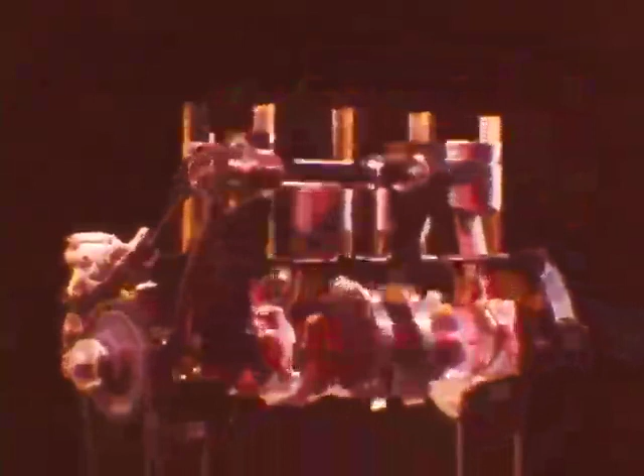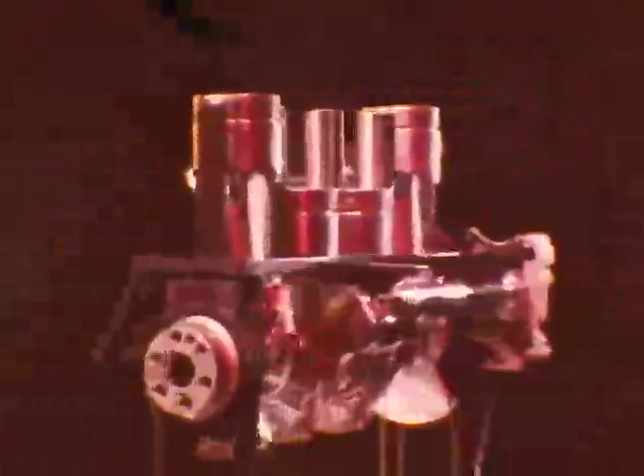The new Dodge Colt models for 1976 offer car buyers all the handling, economy, and styling features of previous models, plus engineering refinements that make these vehicles better than ever before. For the Plymouth side of the family, we now have the brand new Arrow models.

A quick look at the model lineup shows that the Colt is available in 5 basic models, while Arrow is introduced in 3 basic models. Although the Arrow is completely new to some technicians, we are only able to cover major components here. Colt models share many of these components, so we'll point out the similarities and differences as our story progresses.

The Colt instrument panel is essentially the same as before, with oil pressure and charging signal lamps instead of gauges. The panel is held in place by 3 screws at the top, 2 at the bottom, and 1 inside the glove compartment.

The Arrow panel is slightly different in layout, and on some models the console has an oil pressure gauge and ammeter instead of signal lamps. This panel is secured by 3 screws at the top, 2 at the left side, and 3 in the ash receiver opening.

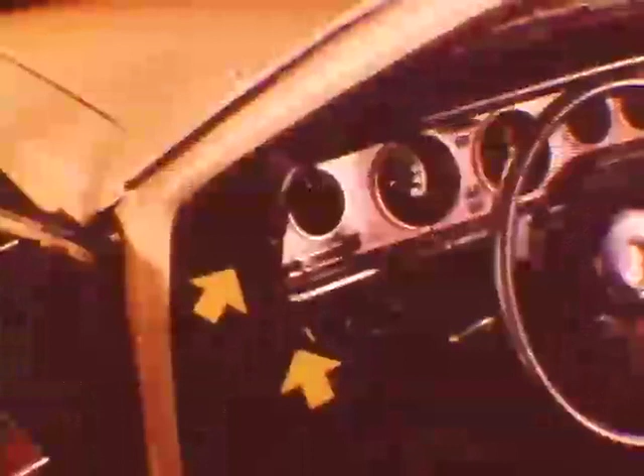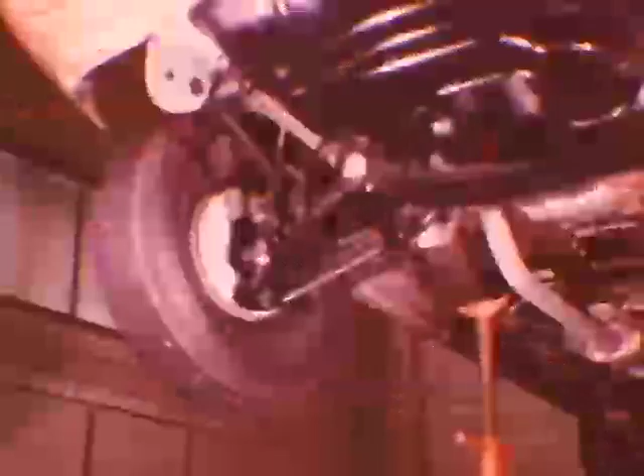Now, moving to the front suspension, we find that both Colt and Arrow have strut-type upper units, which combine a coil spring with a shock absorber and wheel spindle. At the bottom, the Colt unit has an A-shaped control arm, which pivots up and down and braces the spindle against fore and aft displacement. The lower end of the Arrow suspension unit has an I-shaped control arm, held in alignment by a strut which is rubber isolated at its front attachment point.

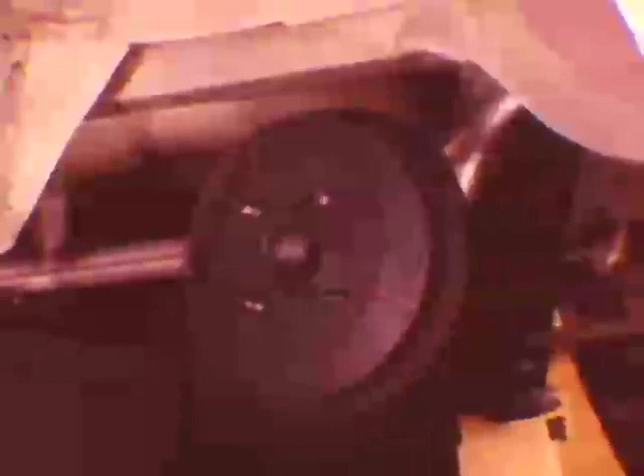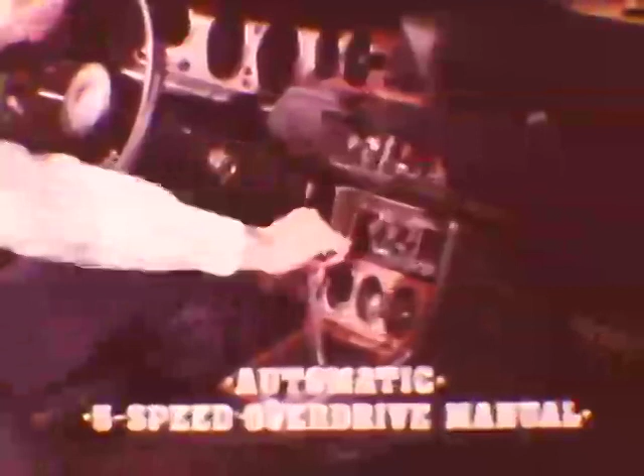Disc front and drum rear brakes with power boost are standard on all but the 1600cc Canadian models. Except for Canadian models, the brake hydraulic system now includes a combination valve. Both car lines are available with automatic or manual shift transmissions. 3 options can be selected with a 1600cc engine and 2 with a 2000cc engine. All are floor shift type.

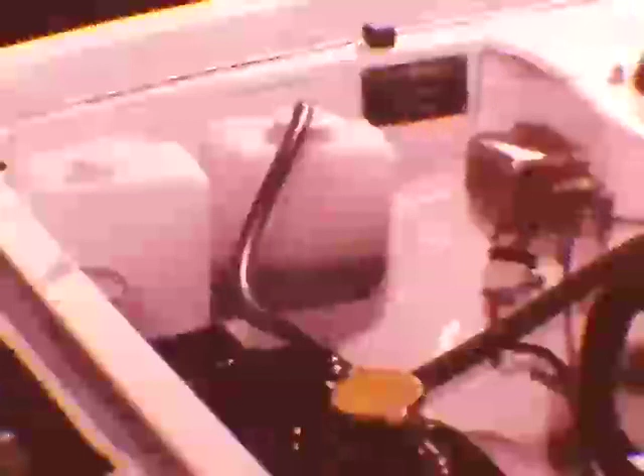The rear axle in both cars is a conventional hypoid gear type with a removable carrier assembly in a one-piece axle housing. Axle shaft bearings are press-fitted on the shafts. The same basic cooling system is used in both car lines. The molded nylon fan has 5 or 6 blades, depending on the engine model. Some models have a torque clutch fan drive. An overflow reserve tank is used on all models.

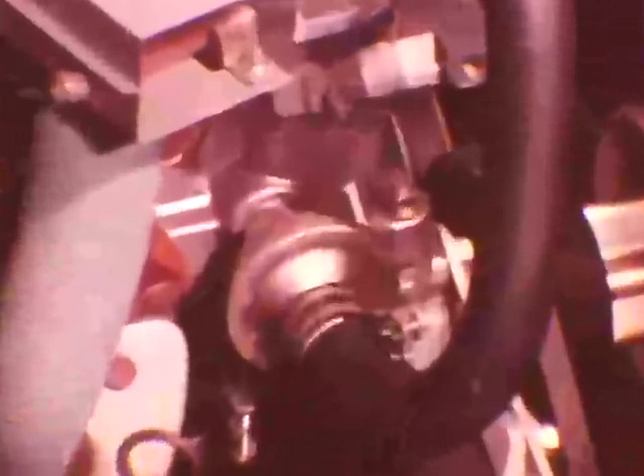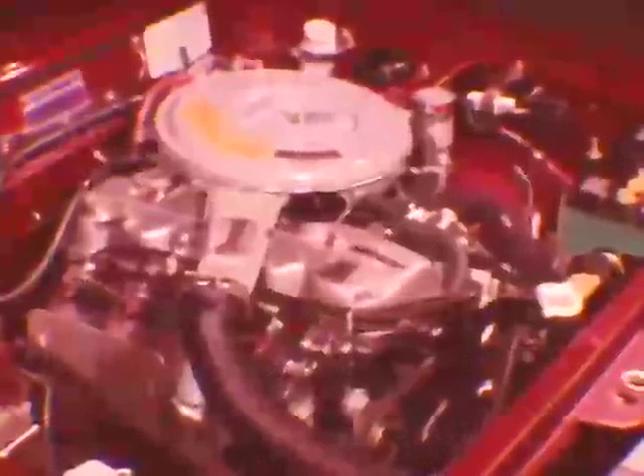The 1600cc engine for both car lines is essentially the 1975 model with minor parts improvements. The secondary air injection system pump has been replaced with a new reed valve exhaust impulse system, which we'll discuss later. A 2000cc engine is also available for both car lines. Based on the previous model, this new engine introduces the exclusive silent shaft feature, an industry first.

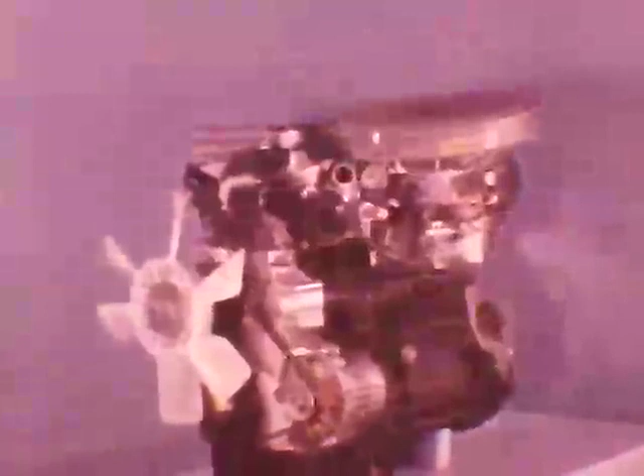The general layout of the silent shaft engine is similar to its predecessor, but its unique vibration damping system eliminates engine vibration periods which produce booming noises inside the car. The silent shaft vibration damping system uses 2 counterbalance shafts, 1 on each side of the engine. The shaft on the right side is located slightly above the crankshaft. The other is also above the crankshaft, but somewhat higher.

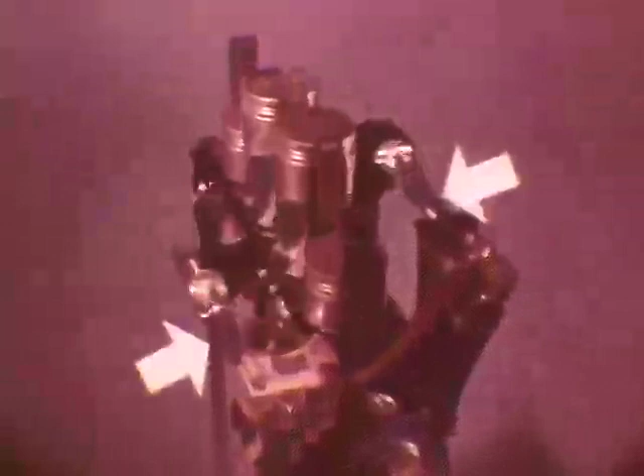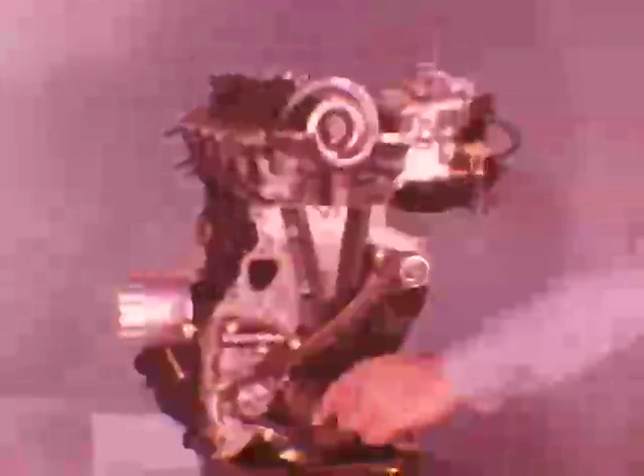The counterbalance shafts rotate in opposite directions, with the left side shaft turning the same direction as the crankshaft. These shafts turn at twice crankshaft speed to produce forces equal and opposite to those which generate the unwanted vibration. The counterbalance shafts are driven by a single-width roller-linked chain located in front of the camshaft timing chain. The right side shaft is geared to reverse its rotation.

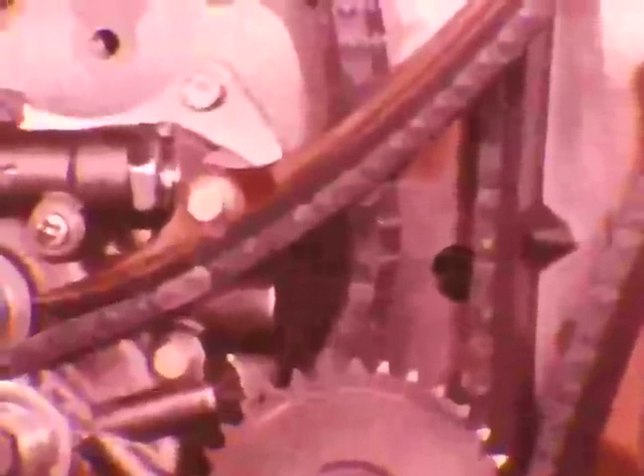The shaft drive gears are enclosed in the oil pump housing, where they also function as oil pump gears. A pressure-operated timing chain tensioner is built into the oil pump housing. The driven gear inside the oil pump is keyed to the front end of the balance shaft and turns the shaft counterclockwise at 2 times crankshaft speed.

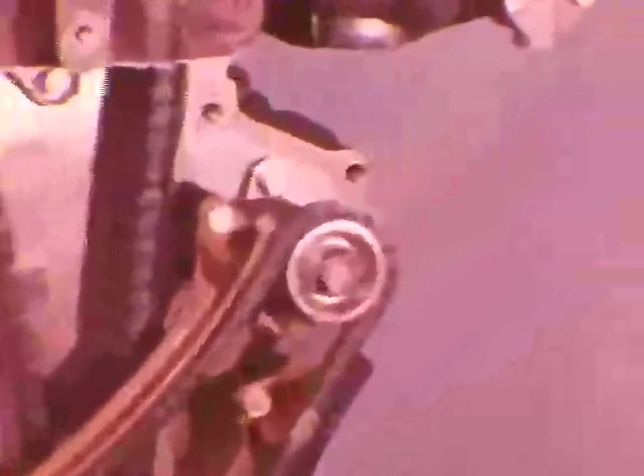The counterbalance shaft drive sprockets are identical and can be interchanged. They have a deep chamfer on one side and are installed with the chamfer facing outward on the upper shaft and inward on the lower shaft. The shaft drive chain must be installed with its bright-plated links aligned with mating marks on the sprockets. If either balance shaft is out of time, the counterbalancing forces will increase rather than decrease the vibration. The chain is kept in position by 3 chain guides.

The upper guide, which is adjustable, is installed first, followed by the guides at the side and at the bottom. The camshaft timing chain of both engines is also installed with its bright links aligned with the timing marks on the crankshaft and camshaft sprockets.

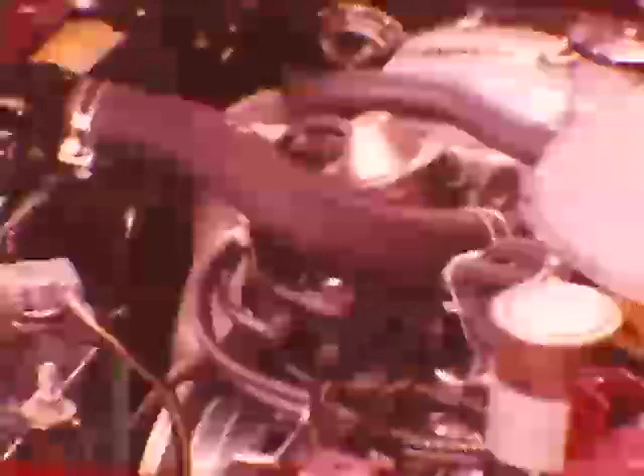The ignition systems for both engines are basically the same. The 1600cc engine distributor is angle mounted on the timing chain case and has a fine timing adjustment mechanism built into the dual diaphragm assembly. The 2000cc engine distributor is mounted horizontally in a bore in the left side of the cylinder head. Timing is adjusted by turning the distributor body as required.

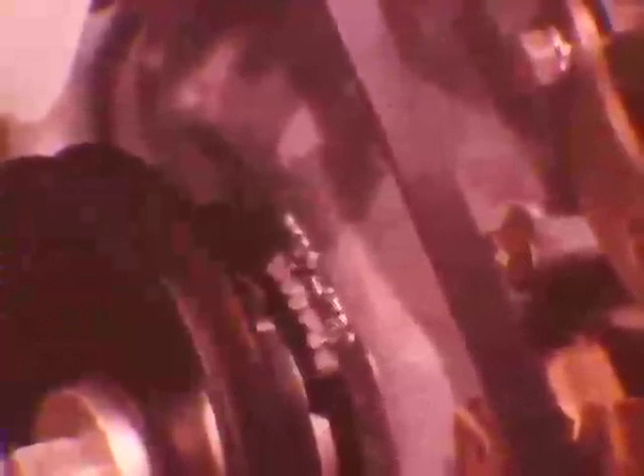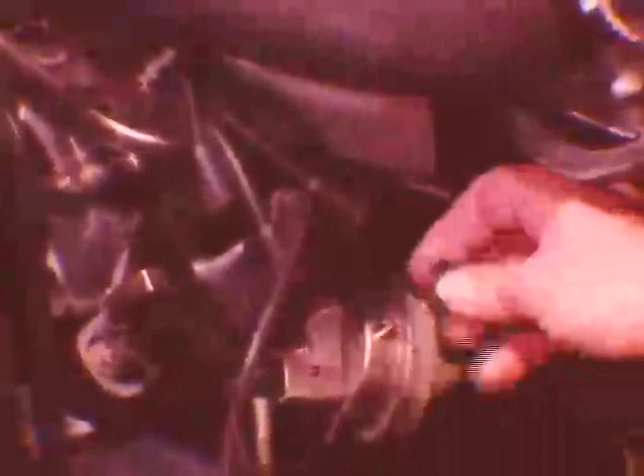The timing index of both engines is cast into the front of the chain case at the left side. The crankshaft mark is a notch at the rear of the shaft pulley. When checking the ignition timing setting on both engines, the rubber cap on the retard side of the vacuum control chamber must be removed to prevent any vacuum retard action. After setting the timing, be sure to replace the cap and recheck the timing.

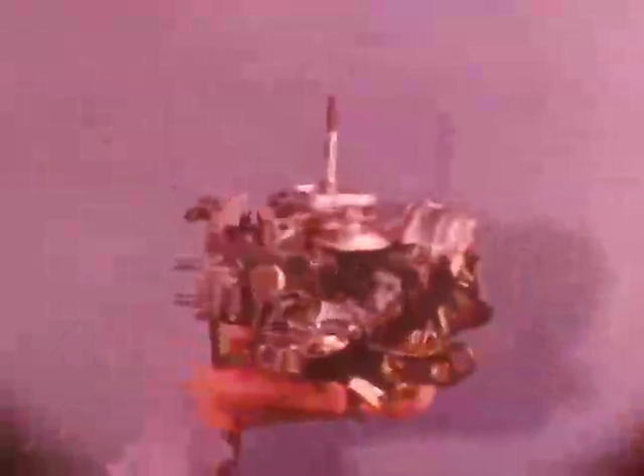Except for calibration differences, the carburetors for both engines are essentially the same. A steel ball shutoff valve is added in the float chamber to prevent rollover leakage. The idle mixture screw is located under the fuel shutoff solenoid. On manual transmission models, the inner throttle shaft screw adjusts idle speed. The middle screw is for dashpot adjustment. The outer screw adjusts fast idle speed. For automatic transmission models, the inner screw also adjusts idle speed, and the outer screw adjusts fast idle speed. There is no dashpot screw.

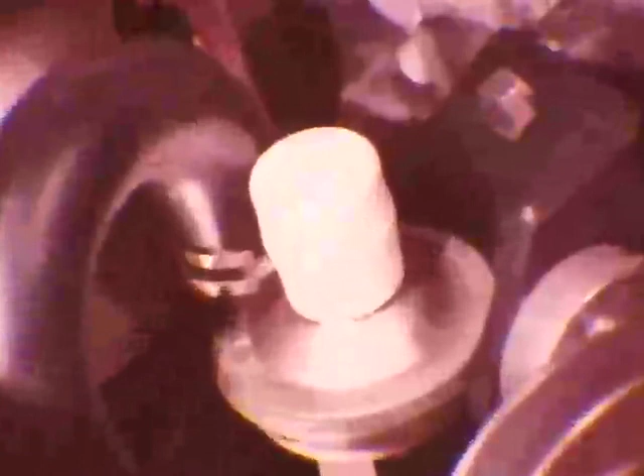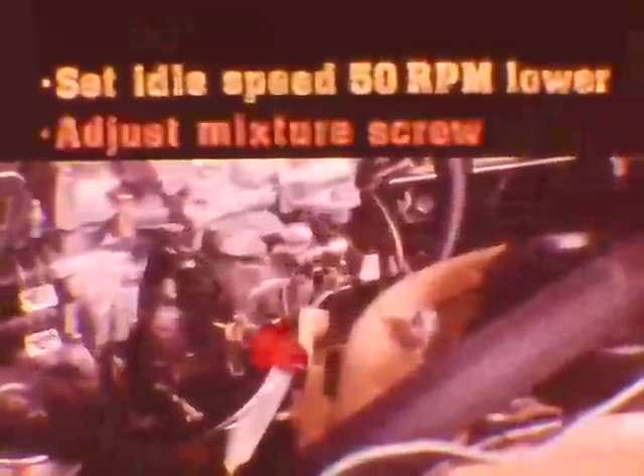To check or adjust idle speed and mixture, the engine must be fully warmed up. Then, with idle set to specified speed, remove the secondary air system hose at the reed valve and cap the valve inlet. Idle carbon monoxide indication must be between 1 to 2.5%. To adjust idle mixture, continue the operation by setting idle speed about 50 RPM lower and then adjust the mixture screw to the leanest possible setting without causing misfiring.

After mixture adjustment is completed, remove the cap and reconnect the air hose at the reed valve. Adjust idle speed to the specified setting and snap the throttle a few times to make sure the adjustment is correct. The reed valve is part of the simplified secondary air system which replaces the air pump system. In this system, the pressure drop which occurs between exhaust impulses is used to draw fresh air from the air cleaner. The air flows through the one-way reed valve into the exhaust ports where it reacts with the gases to reduce carbon monoxide and hydrocarbon emissions.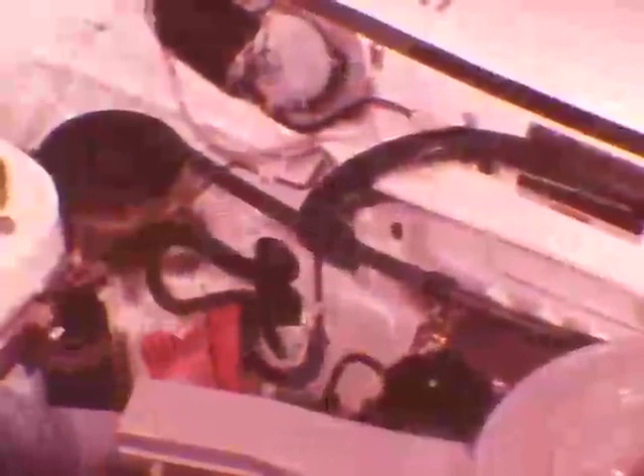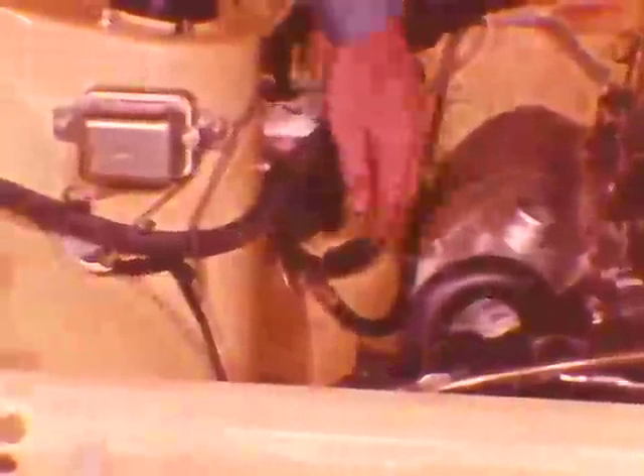The remaining emission control systems are similar to those used on other Chrysler Corporation vehicles. The evaporation control system has a vapor vent line leading to a charcoal canister from a vapor liquid separator at the fuel tank. A second vent line leads to the canister from the carburetor air cleaner. A new rollover check valve is installed in the line between the canister and the fuel tank. This is a one-piece molded valve with two check balls which shut off liquid fuel flow to the canister and air cleaner if the car accidentally rolls over. The Arrow evaporation control system tank vent line has a pressure vacuum valve in the left rear body section instead of in the filler cap.

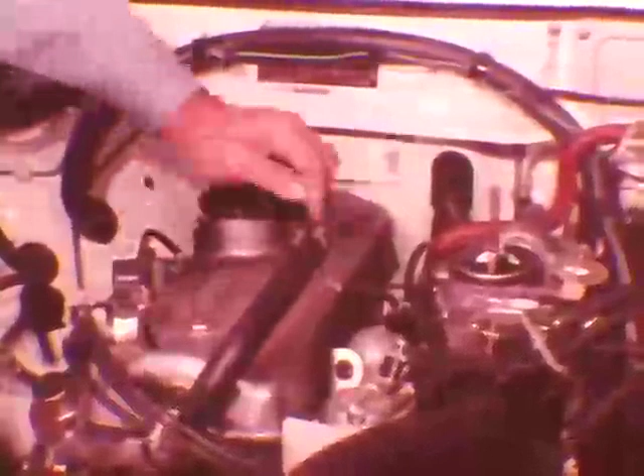The crankcase ventilation system uses two rocker cover hoses to recycle blow-by gases. At part throttle, gases are drawn from the side hose into the intake manifold. Fresh air from the air cleaner enters through the front hose into the engine. At wide open throttle, gases are routed to the combustion chambers through both hoses.

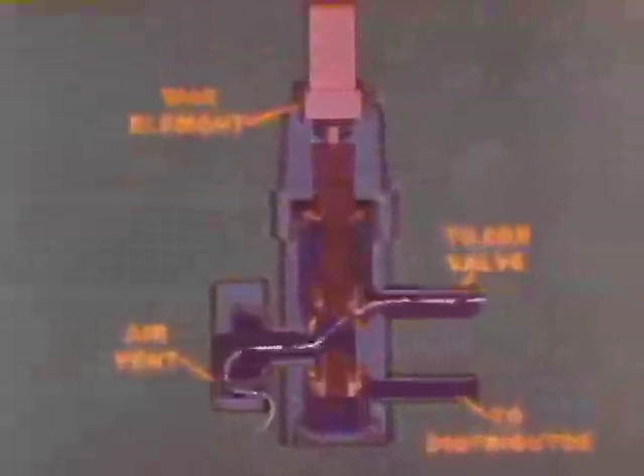A two-section thermal valve in the water jacket controls EGR valve operation and, when needed, advances the ignition timing to prevent possible engine overheating. When the engine is cold, the thermal valve vents the EGR vacuum circuit to keep the EGR valve closed. At this stage, the distributor retard vacuum circuit is not vented, so it operates normally. As the coolant warms above 131 degrees, the valve air vent is cut off from both vacuum circuits, allowing normal EGR valve and distributor retard operation.

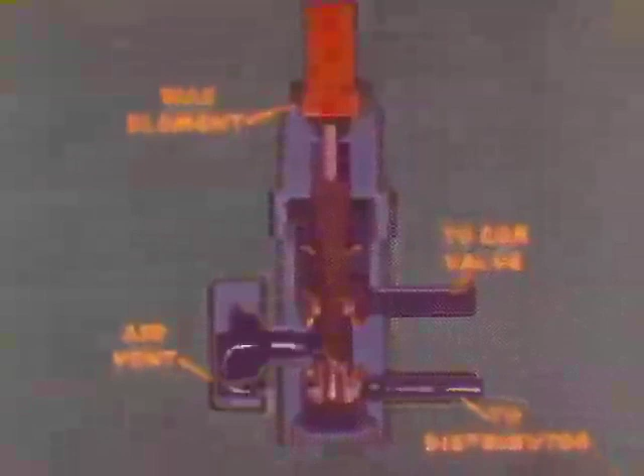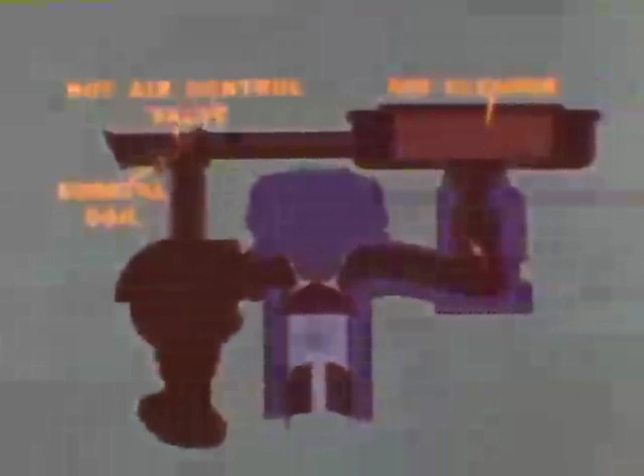Above approximately 203 degrees, the thermal valve continues normal EGR valve operation but vents the distributor retard line. The timing now moves to full advance, speeding up the engine and cooling action until coolant temperature drops below the cut-in point. The heated air intake system for both engines draws air in through a simplified version of the air heating system used on other Chrysler Corporation vehicles. Here, the hot air control valve is operated directly by a bimetal coil located in the snorkel.

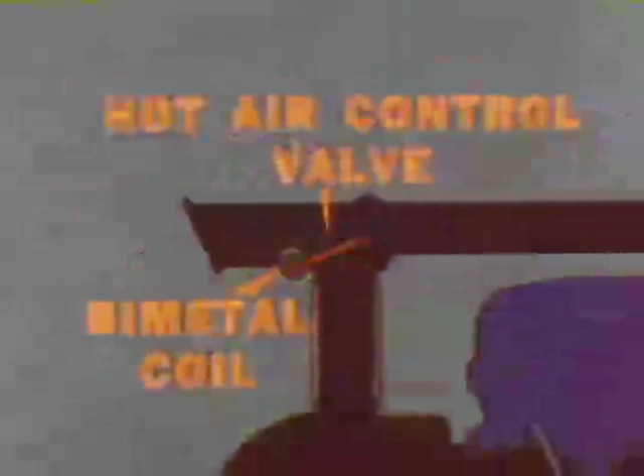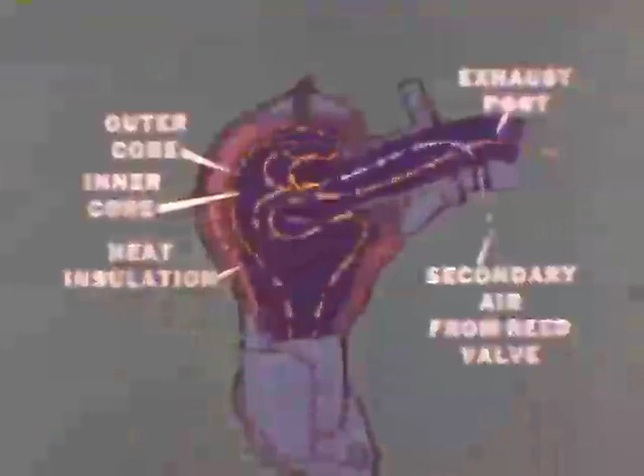California models are equipped with a thermal reactor in place of the standard exhaust manifold. Exhaust gases are mixed with secondary air inside the reactor and reburned to substantially reduce emissions before they leave the tailpipe. There's more to the Colt and Arrow story than these brief highlights, but you're off and running, so be sure to dig into your reference books and service manuals for the additional know-how that will help you contribute to the success of your customer assurance program.